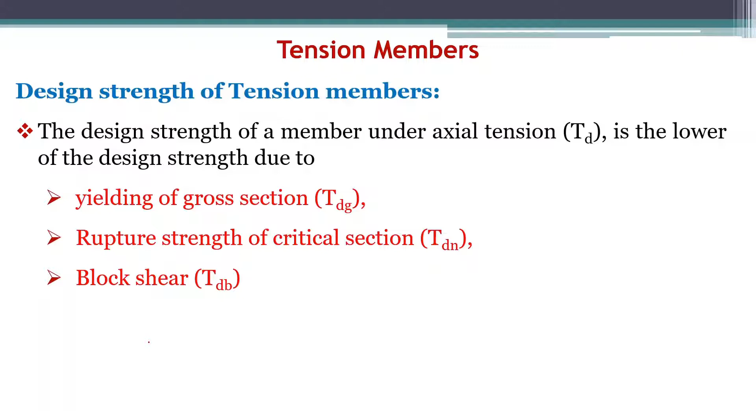The tension members undergo three types of failure. That is why we need to calculate the strength in all three criteria. Whichever is the least, that is the strength of the tension member under axial tension, that is Td. Now let's look at them one by one. First is the design strength due to yielding, high deformation of a cross section.

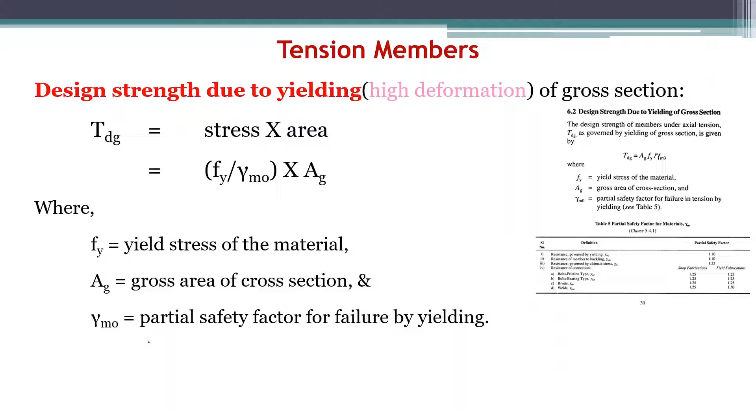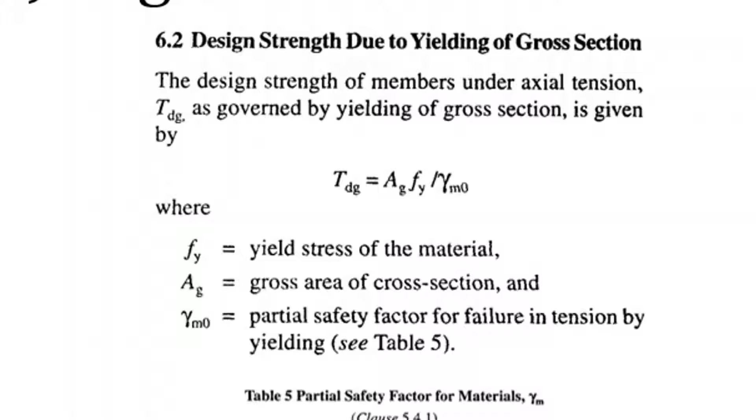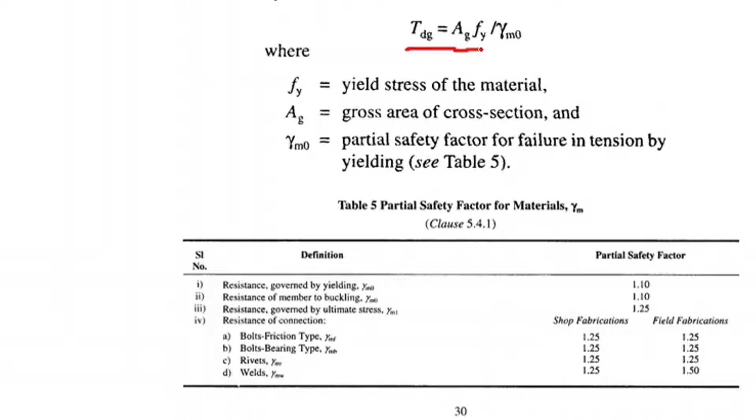If you look at IS 800 clause 6.2, it is given that Tdg, the tension strength in gross yielding, is equal to Ag Fy upon the partial safety factor. As we have already discussed, the partial safety factor is given in Table 5. Gamma m0, resistance governed by yielding, is 1.1. The equation is area into yield stress upon partial safety factor. Here Fy is the yield stress of the material, Ag is the gross area of the cross section, and gamma m0 is the partial safety factor for failure by yielding.

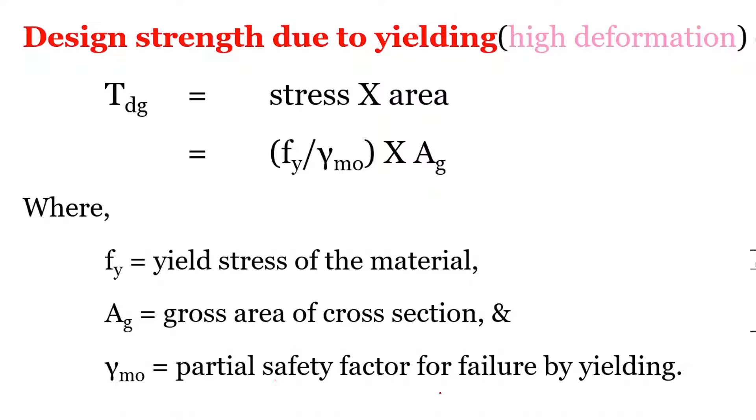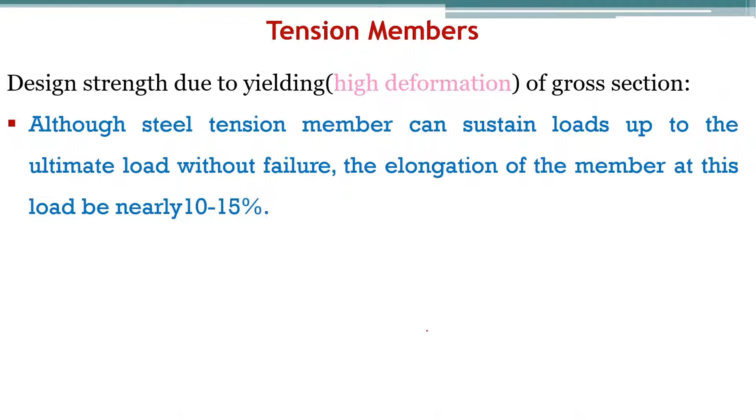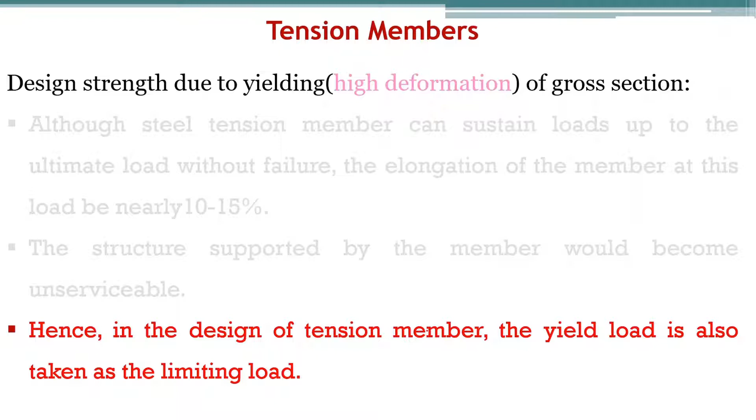Although the steel tension member can sustain a load up to the ultimate load without failure, because once it reaches the ultimate load the member undergoes necking and failure will happen, even so it can withstand the ultimate load, the elongation of the member at yield itself is nearly 10 to 15%. The structure supported by the member would become unserviceable. Even at that stage the structure won't undergo complete failure, but because of that elongation, it can't be used for what it has been designed for. Hence, in the design of a tension member, the yield load is also taken as the limiting load. That is why yielding of a cross section is also considered as one of the failures.

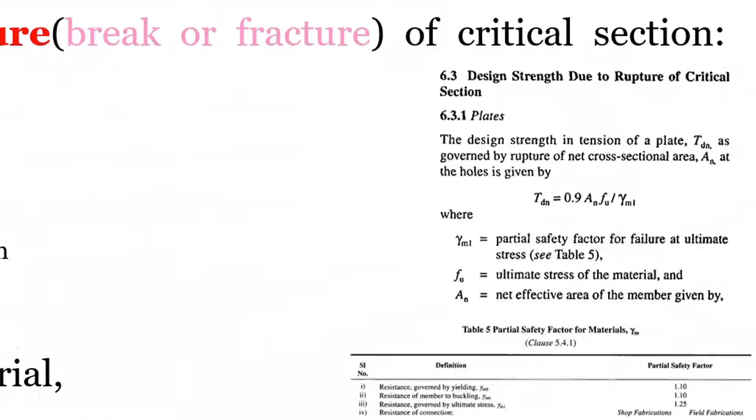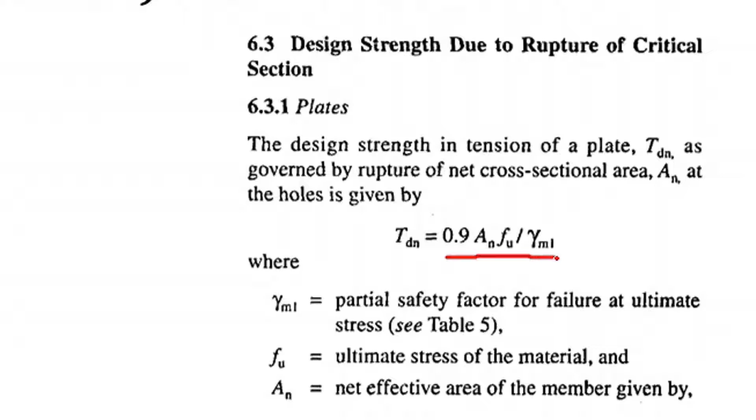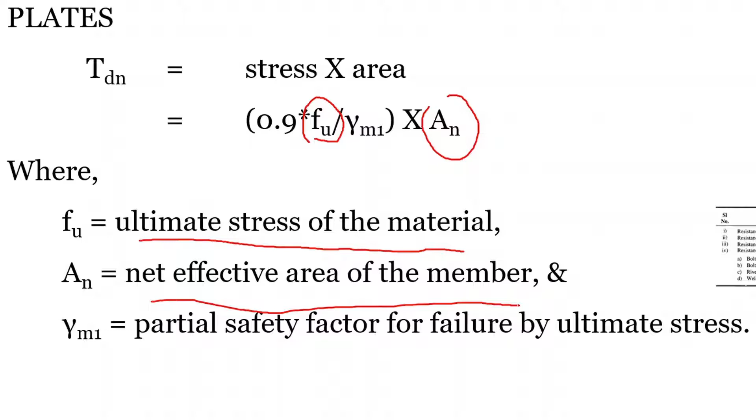Next, design strength due to rupture, break or fracture of a critical section. If you look at IS 800 2007, in clause 6.3.1, they have given the design strength due to rupture of a critical section for a plate. If the tension member is a plate, then the design strength is equal to 0.9 An Fu upon gamma m1. Again, gamma m1 is stated in Table 5. Gamma m1 is 1.25. Fu is the ultimate tensile stress of the material, and An is the net effective area of the member. We'll discuss the net effective area separately. That itself is quite involved.

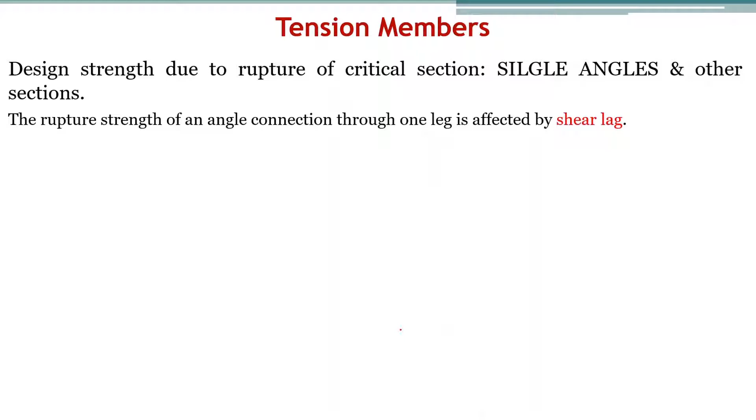But overall, the whole cross section is responsible for taking the load. At this connection, the angle has to transfer the load to the plate through the connection. So all the load which has to be transferred to the plate happens only through one leg. The connected leg is subjected to more load than the outstanding or unconnected leg. The connected leg fails first, then it prolongs to the unconnected leg. In other words, the connected leg is subjected to more stress than the unconnected or outstanding leg, which takes very little load in the connection.

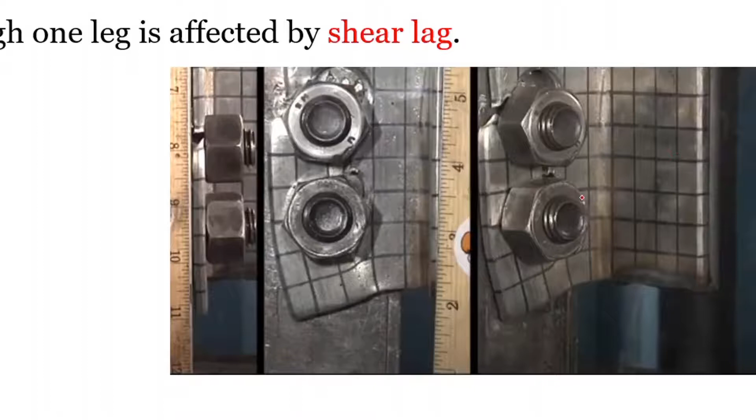This concept is called shear lag. Again, load is stress into area, and we have stress into area for the connected leg and also for the unconnected leg. Because of the shear lag concept, the unconnected leg takes very little load, and that is countered in the equation by multiplying with beta. Beta is the area reduction factor, given in IS 800 2007 as 1.4 minus 0.076 multiplied by w by t, multiplied by Fy by Fu, multiplied by bs by Lc.

Now we'll see all those things in detail when we solve a numerical,

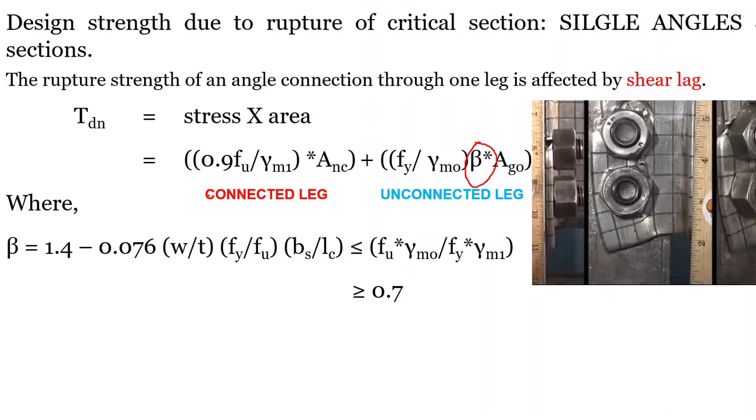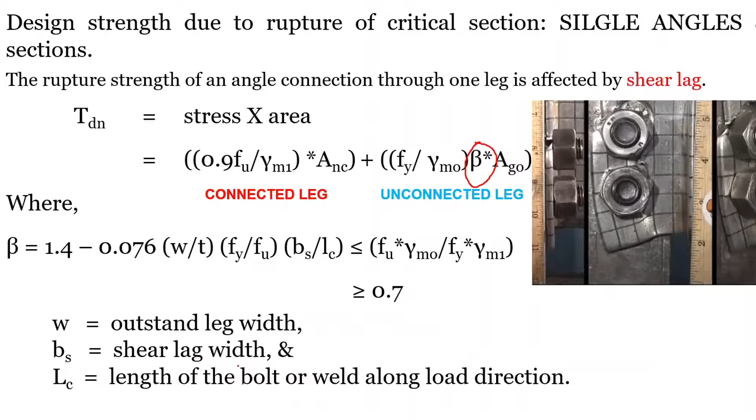where W is the outstanding leg width, T is the thickness, Fy and Fu are the yield stress and ultimate tensile stress. Bs is the shear lag width, Lc is the length of bolt or weld along the load direction. When loaded, the cross-section area experiences nonlinear bending and shear stress distribution. Due to this, the unconnected leg lags behind the connected leg, as I said earlier. This phenomenon of lagging is called shear lag.

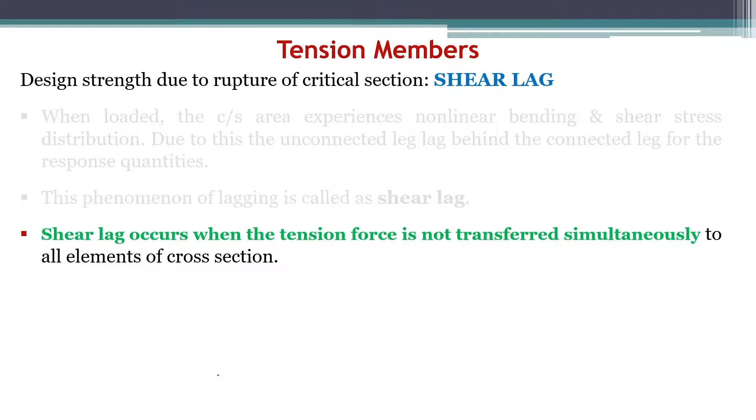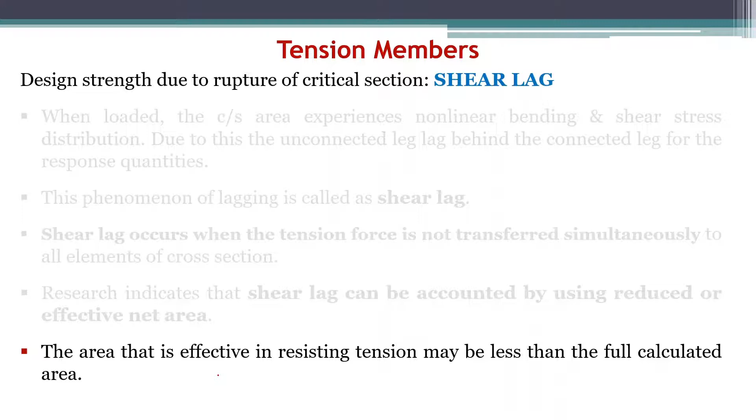Shear lag occurs when the tension force is not transferred simultaneously to all elements of the cross section, especially in the connection, in the joint. Research indicates that shear lag can be accounted for by using a reduced or effective net area. That is why beta comes into the picture when you are calculating the strength of the unconnected leg. The area that is effective in resisting tension may be less than the full calculated area.

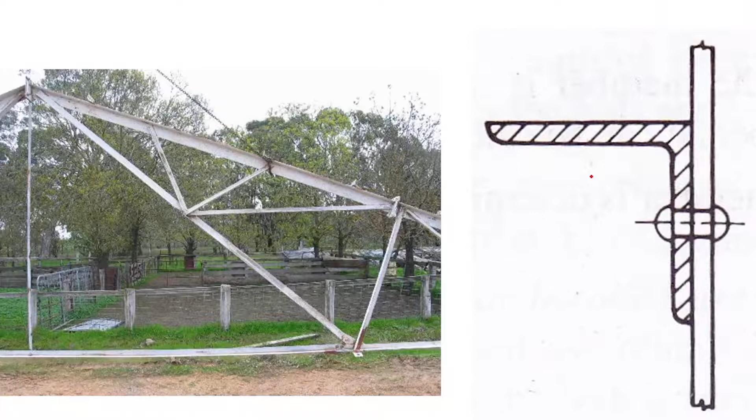Angles are extensively used as tension members in trusses and bracings. See, here is an example of a truss. In most places, the truss is made of angles. So, angles are extensively used. If you look at the connection, one leg is connected to the gusset plate. In all the joints, the angle has to be connected to the gusset plate, and mostly only one leg is connected, and the other leg is the unconnected leg. So if you have a connection like this, then shear lag comes into the picture.

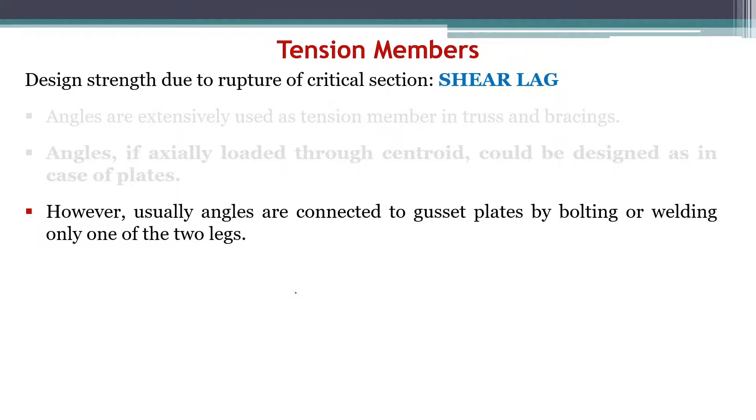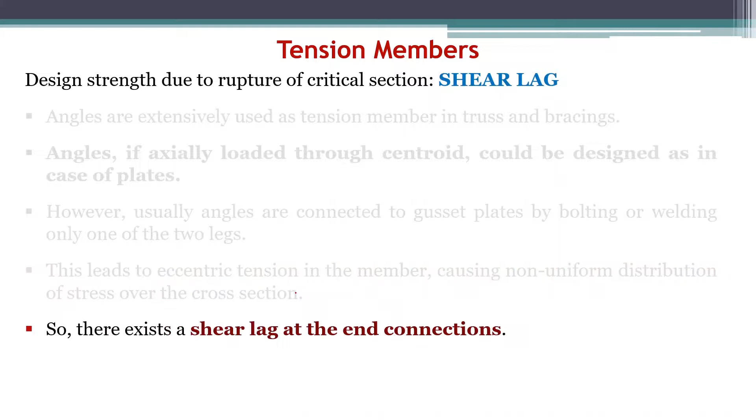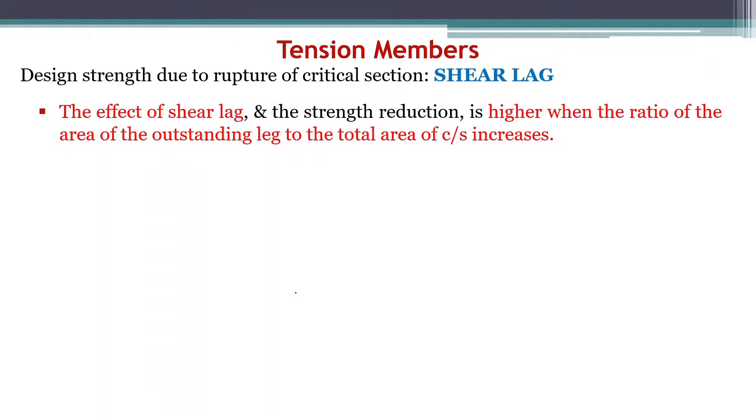Angles, if axially loaded through the centroid, could be designed as a plate. However, usually angles are connected to the gusset plate by bolting or welding only one of the two legs. This leads to eccentric tension in the member, causing non-uniform distribution of stress over the cross section. So, there exists a shear lag at the end connections. The effect of shear lag and the strength reduction is higher when the ratio of the area of the outstanding leg to the total cross section increases. Even double angles connected on opposite sides of the gusset plate experience the effect of shear lag.

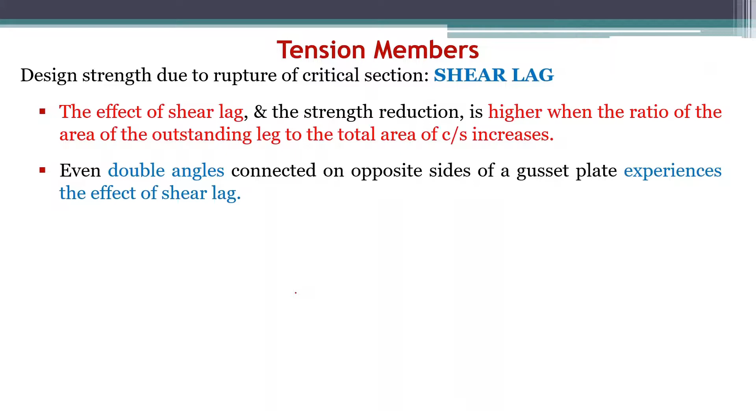And if the unconnected or outstanding leg area is a larger percentage of the total area, then you will get an increase in the shear lag effect. Because we know that this leg takes very little load in the connection. If you have more area of the member which takes very little load, then you will get a higher shear lag effect, so the effective cross section area is much lesser than the cross section area the member has. So the shear lag effect is more if the outstanding leg area is more.

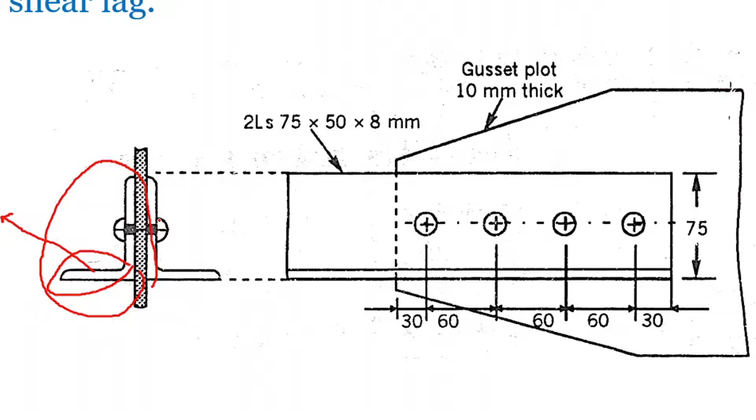And even if you connect two angles back to back, on either side of the gusset plate or on the same side of the gusset plate, still you have a leg which is unconnected on both sides. So that is why the shear lag effect will prevail even in the double angle connection.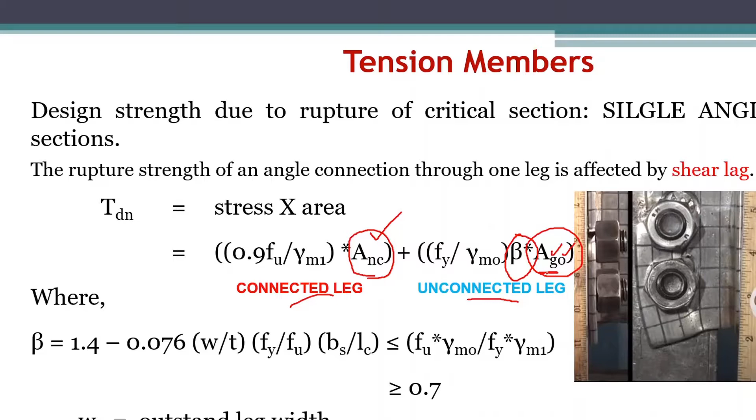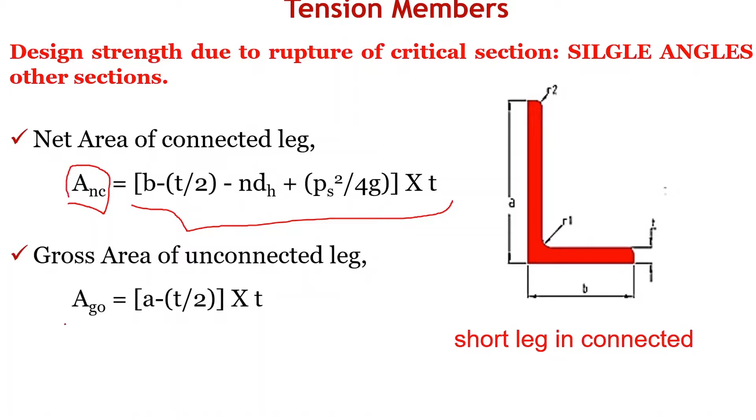Design strength due to rupture for a single angle: ANC is the net effective area of the connected leg, and AGO is the gross area of the unconnected leg. Why do we use net? Because in the connected leg we put holes. So you always have to consider only the net area of the connected leg, and there is no hole in the unconnected leg, so the outstanding leg's gross area is AGO. To calculate these two areas, we use this simple equation. Again, we'll look in detail at this equation in the net effective area session. The ANC is the net area of the connected leg. AGO is the gross area of the unconnected leg.

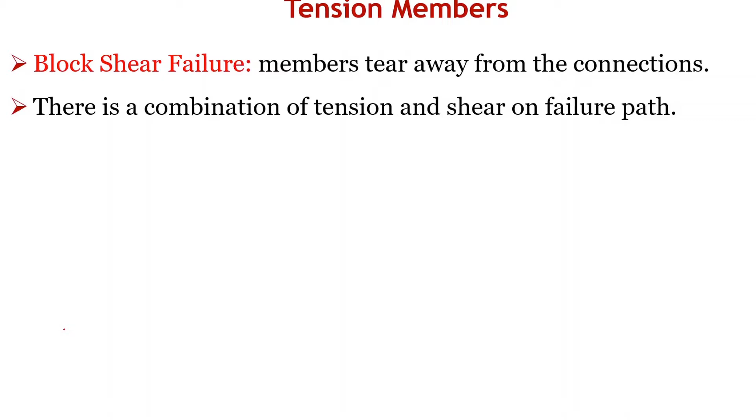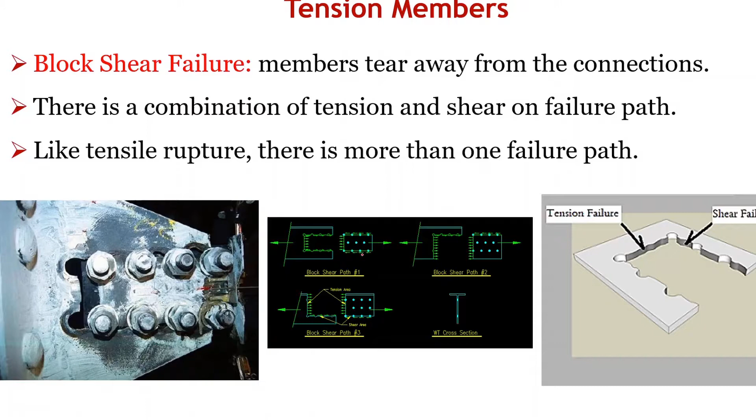Block shear failure: the member tears away from the connection. There is a combination of tension and shear on the failure path. Like tension rupture, there is more than one failure pattern or path. As we discussed in the failure modes, block shear failure may happen like this or even like this. And if you look at this picture closely, this section is subjected to pure tension because the load is applied in this direction, and this cross section is subjected to shear.